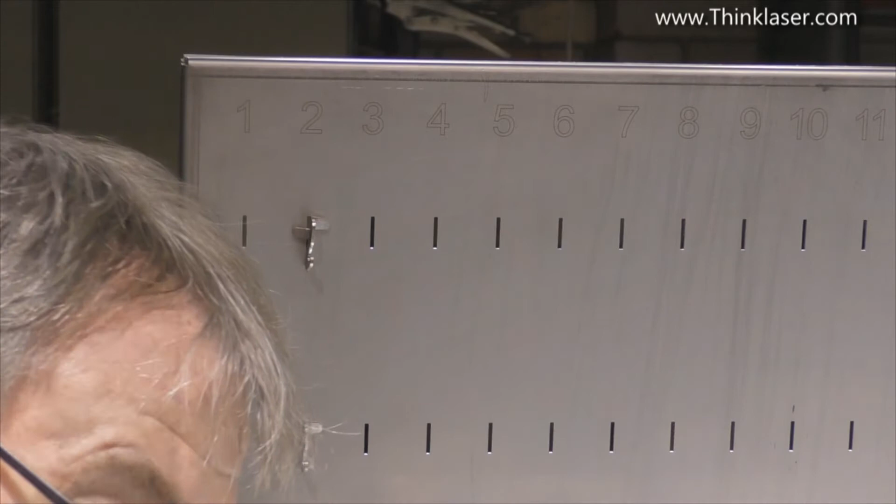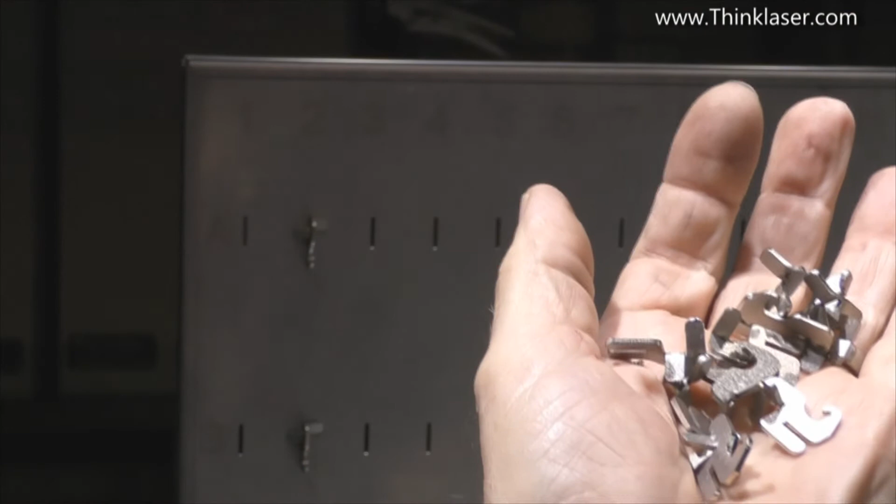The bunches of keys are various sizes, anything from the size of my fist down to a simple bunch of keys like mine. You can't have all these keys at the same pitch, so I've designed special hooks that fit into these slots in a solid manner. We pop them in the slot and then gently tap them down, and they remain permanently fixed in the slot. I say permanently, until you knock them out again.

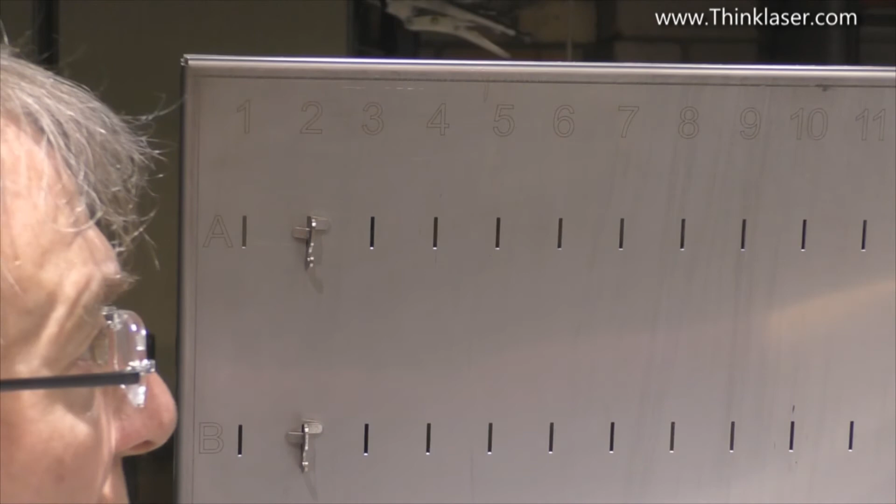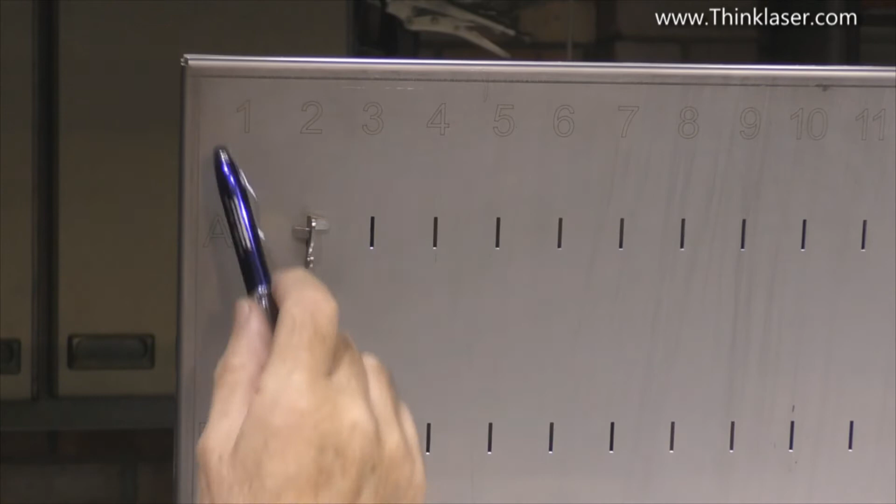What we need to do is mark this sheet up, as has already happened across the top here, with a laser, a proper metal laser engraver, and you'll see it's been numbered across the top. So all these slots, just like a spreadsheet, have a reference: A, B, C down the side and numbers across the top. So every bunch of keys can have its own reference.

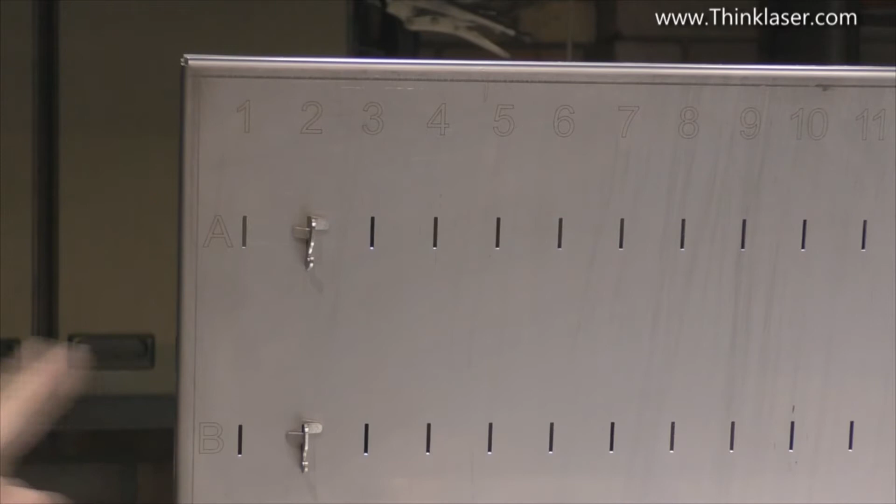The problem is these numbers, in this light, you can just about see them. But to be honest, they're not very distinct in a dark cupboard. What I've decided to do is overwrite these numbers elsewhere with etched solid black numbers and letters. That's what I'm going to show you today.

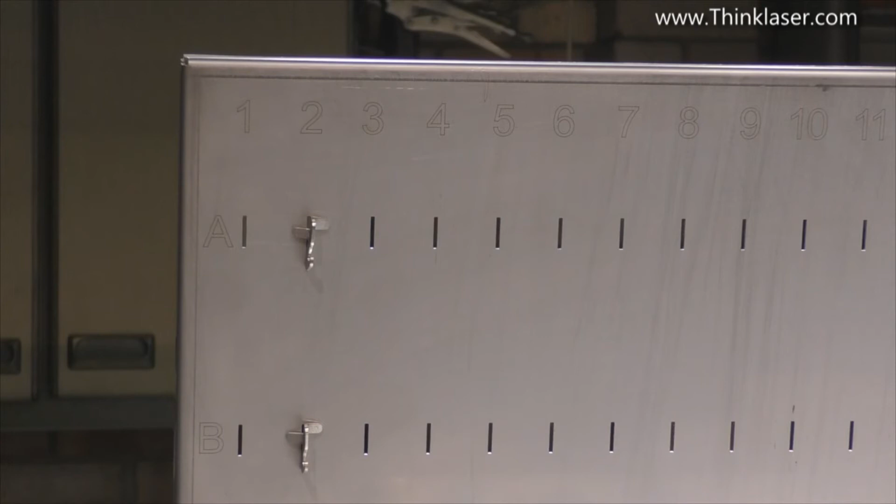Before we start that process, we need to go through a little bit of theory. There are some fundamental things about the laser beam which, in a way, I've been slightly misleading you about up to now. A laser beam is a parallel beam of light, and all the light is traveling in one direction, running completely parallel. It's what they call coherent monochromatic light. It is a light beam, but it's invisible.

I've been referring to it up to now as a beam of heat. That's where I've been misleading you, because it isn't really a beam of heat, it is a beam of light. It's only when that light hits a surface and gets absorbed into the surface that it turns from one energy form to another, from light energy to heat energy. If you can understand that simple principle, it will give you a much clearer understanding of how and why the laser beam works.

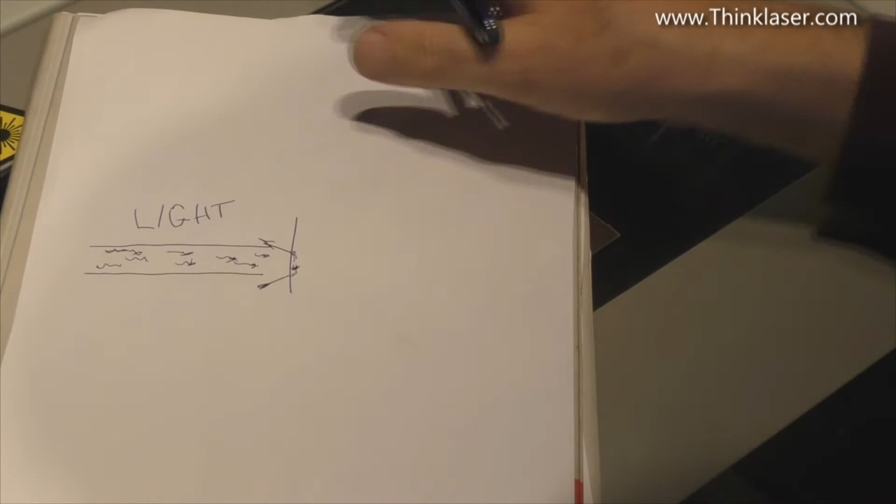When our infrared beam hits a suitable reflective material, and most metals are reflective to some degree, there are some metals which are extremely reflective, things like silver, gold, aluminium, copper. There are other metals, such as this piece of stainless steel I have here, which is about 90 to 95% reflective.

So when we fire this beam at any organic material, such as wood, leather, card, any of those sorts of materials, the surface absorbs the energy and starts to heat up, and if you heat it up enough, it will burn. That's the process by which cutting takes place with organic materials.

Now, with acrylic, the absorption into the surface creates heat, but the material immediately evaporates, it doesn't burn. If you fire it into water, the water absorbs the energy within the first probably less than a millimetre, and heats the surface of the water up so much that it boils and creates steam.

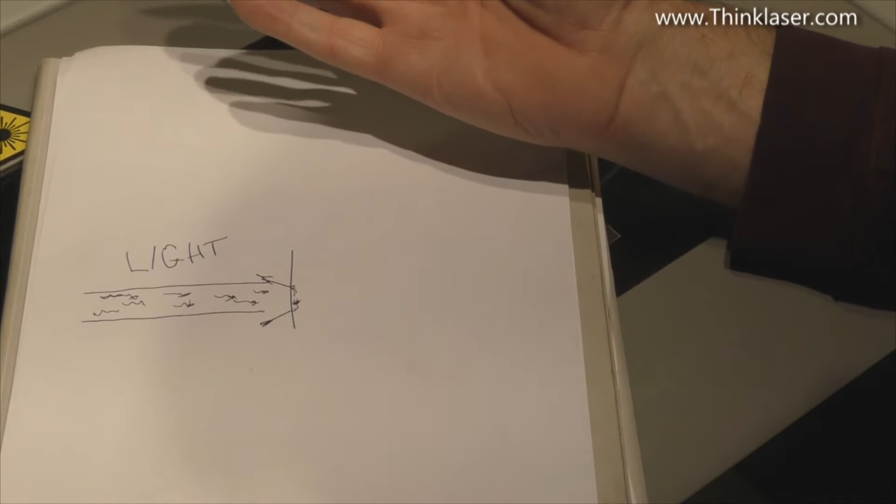Now, you've seen me demonstrating that probably in some of my earlier videos. So all I'm doing is reinforcing the fact that this beam is totally innocuous until it gets absorbed by an absorbing surface. So when we looked at creating marks on our piece of stainless steel, we were doing damage to the surface.

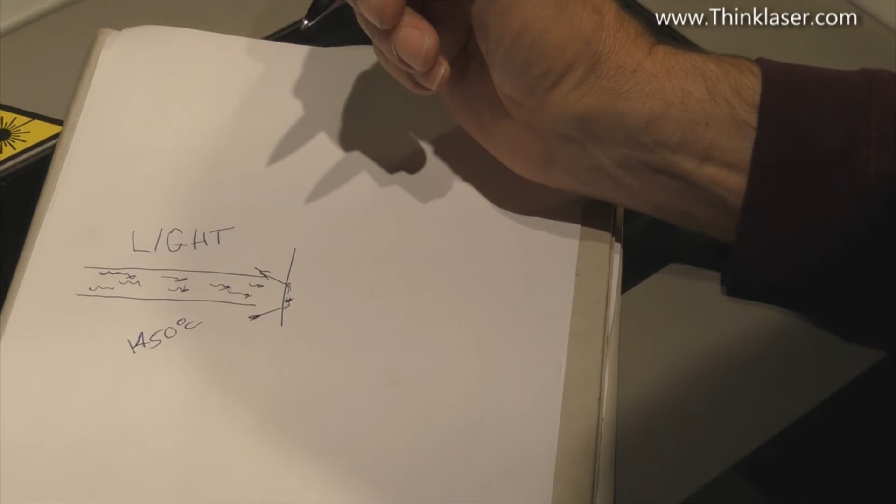Stainless steel melts at about 1450 degrees C. We're going to need a lot of heat to cause damage to the surface of our stainless steel, and we're not going to get that out of a 60-watt parallel beam like this.

Well, two things are going to work in our favour. First of all, the light in this beam is not uniformly distributed across it. We've talked about it before, and we've said that the energy distribution in this beam is what they call Gaussian. In other words, it looks something like this, where the centre of the beam is very intense light, and the light dissipates towards zero as we get further towards the edge of the beam.

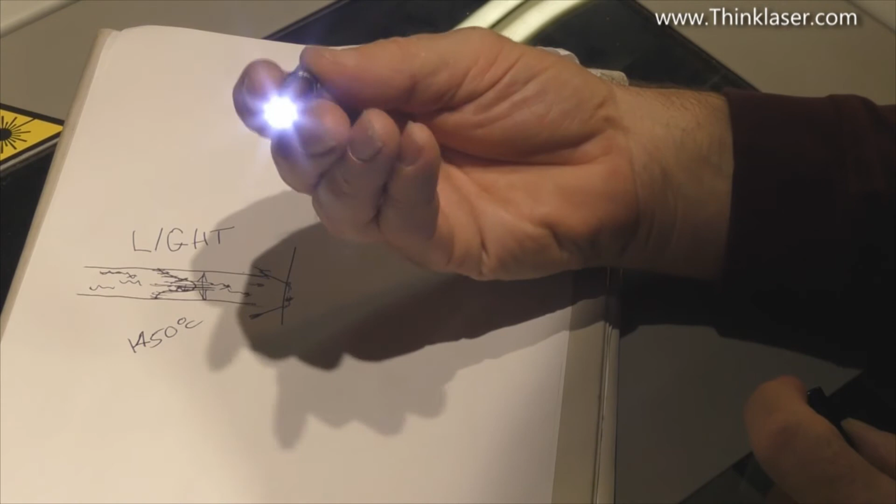Here I've got a lovely little magic pen, and it's a great demonstrator of that principle. If we look at that light there, you'll see that it is very intense in the middle, and it gets weaker and weaker as it goes to the edge. Well, that's exactly what this beam of light is doing as well. It is not a uniform puddle of energy.

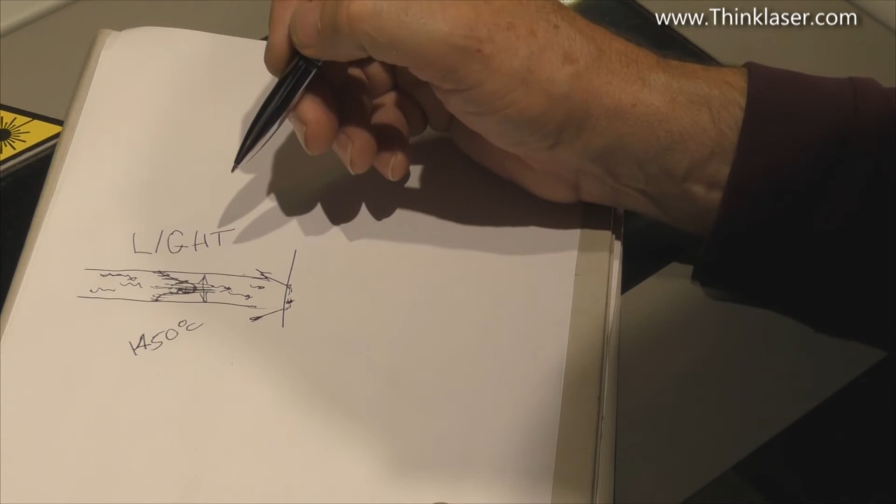When I've tried to measure with a thermocouple the temperature in the middle of this beam here, I know that it is more than 1300 degrees C because I've melted the thermocouple, and that is in the standard raw beam, as I call it.

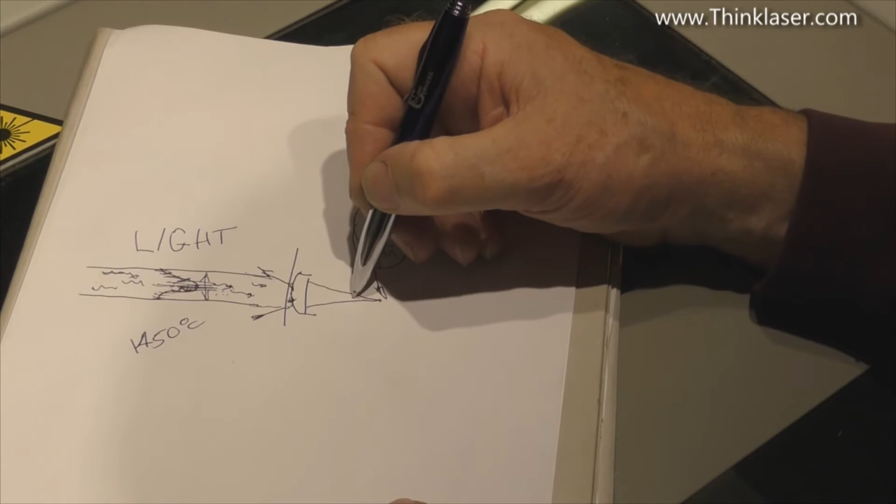But what we would then do is pass this beam through a lens where it would come down to a very, very small area, something that we've previously called the spot size. A 2-inch lens has got a spot size of about 0.1 of a millimetre. This concentration of the light becomes greatly amplified, and we get very, very high temperatures now at this spot of light because the energy density has been increased tremendously.

So now we can do damage to the surface of stainless steel. But of course, remember what I said to you, stainless steel is in fact reflective. So whatever you fire at the stainless steel, most of it will be firing back at your lens. And this time it will be at a very high temperature, a very high energy density, because it's firing off of a flat surface. And so consequently, it'll come back up here, and it's likely to damage the surface of your lens.

Now, if I shine my light on that lens there, you can see that little black spot there. Well, look, I've removed the coating from the surface of the lens by doing just that, reflecting the beam back onto the lens surface. And so that lens has now been completely destroyed.

So if I can't mark the metal surface by firing the laser at it, as we do in most products—you know, we just fire the laser at it and it etches the surface—well, we can't do that with metal because of this reflective property. So what we've got to do is adopt a different procedure.

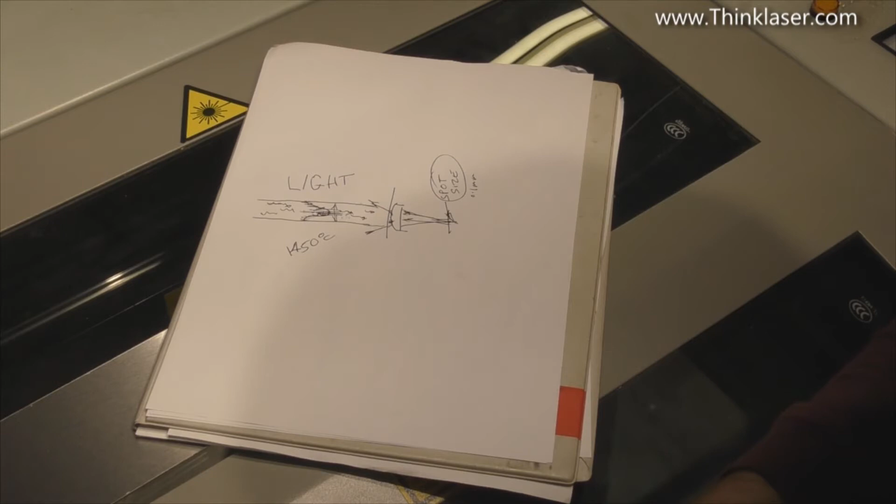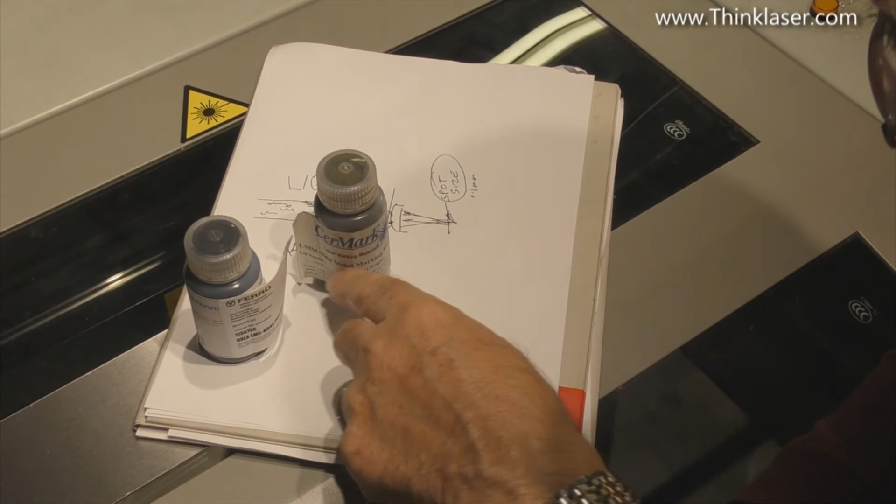And the procedure that has normally been adopted is to buy some expensive chemicals. This is a product called CerMark. This one's called a metal marking material, and this one is glass marking material. You can normally only get this stuff in the States. If you try and buy it in the UK, it's even more expensive because it has to be transported under very special conditions, and those transport conditions hike the price up even more. So from being maybe £10 or £12 in the States, it may be as much as £50 or £60 to buy that same bottle of material here in the UK.

Now, how does this material work? Well, basically you paint it onto the surface of your steel, your stainless steel in particular, and then you fire your laser beam at it as though you were engraving normally.

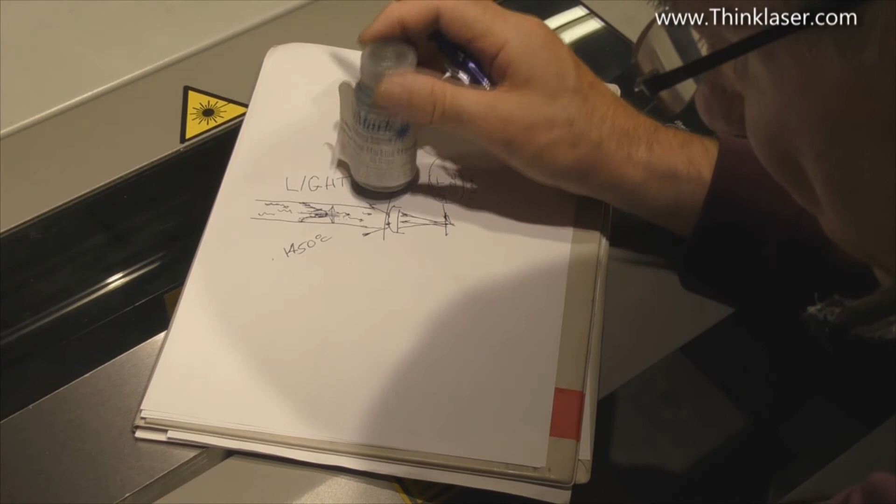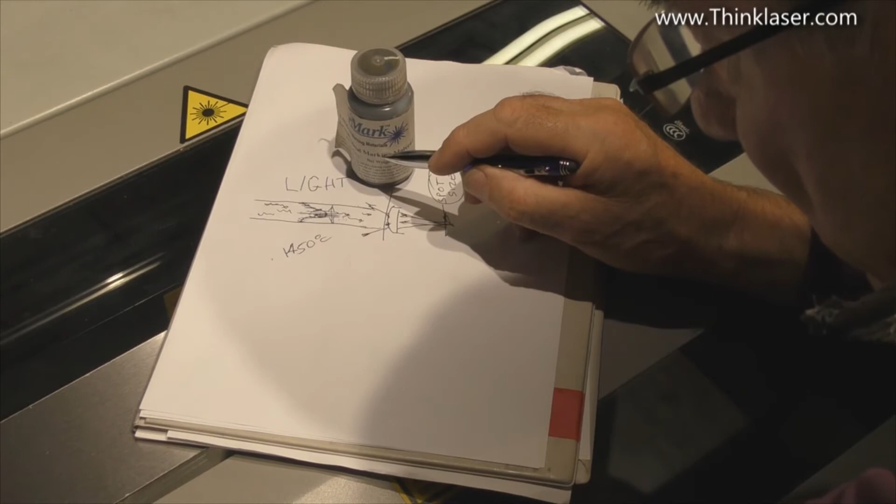Although you've got a very thin layer of this material sitting on the surface of your stainless steel, this material will absorb all the energy and convert it into heat. In heating up, it transmits some of its heat, quite a lot of it, into the surface of the stainless steel underneath. The combination of heating this material on the top surface and the stainless steel beneath causes a bonding action between some of this material and the stainless steel.

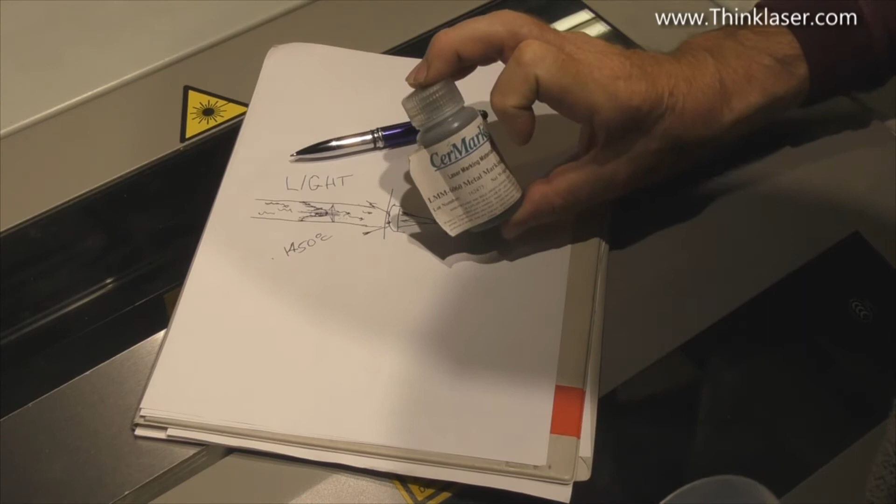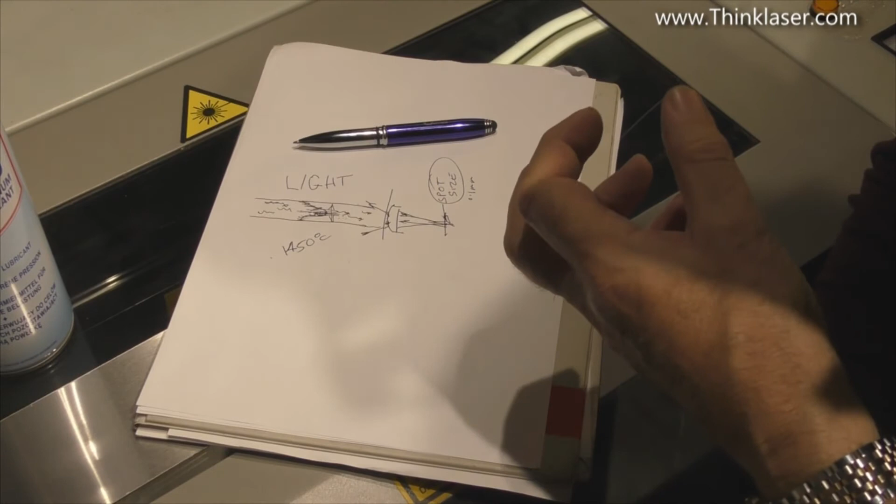That's basically the principle we're going to use today to mark this stainless steel. Instead of this little bottle of material, which would have cost me £60 in the UK, I'm going to use some of this spray, which cost about £10 or £12. These two materials aren't really the same, but there's sufficient of this active material in this dry film molybdenum disulfide lubricant that we can use it to perform almost the same task. If we get the combination of speed and power correct, we shall get a very good black bond on this surface.

Like any normal spray paint, you have to make sure this stuff is thoroughly mixed before you spray it. Then what we need to do is just spray the surface fairly liberally—quite a reasonably thick coating, as you can see. And we'll just get rid of the excess.

Now, because I'm very impatient, I shall use my hot air gun. It doesn't need to be rock hard, it just needs to be dry. We've now got a nice matte grey surface.

That is the surface, a very thin surface, that will more or less 100% absorb the energy from the laser beam. I've set this up to the correct focal distance. I've got a 2-inch lens in there, and I'm going to run this initially at about 100 millimeters a second, but I've got maximum power coming through the lens.

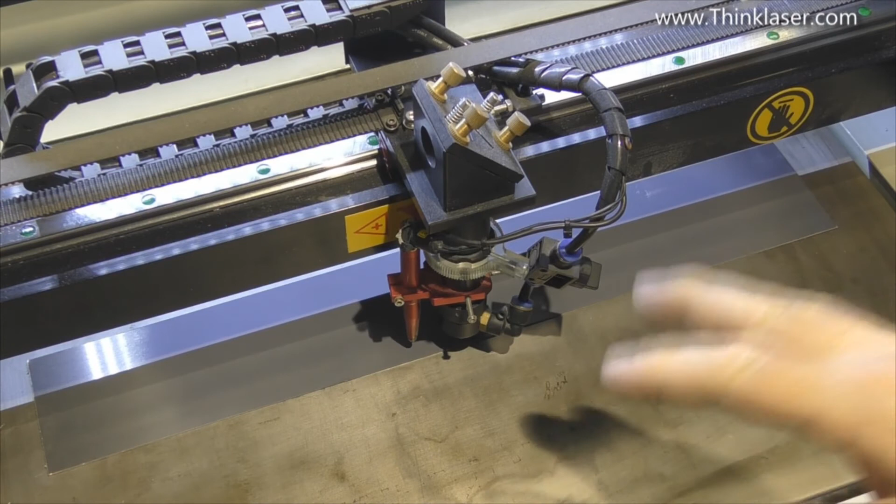We've got to try to develop enough heat in a single spot to produce this chemical bond. If we run too fast, we shan't get enough heat into a single spot to produce that bond, so I may have to slow it down if I don't succeed in the first pass. I'm going to close the lid down because this stuff produces some rather strange smelling fumes, and I'm not sure what they are. So I want to make sure I extract them safely into my Purex unit.

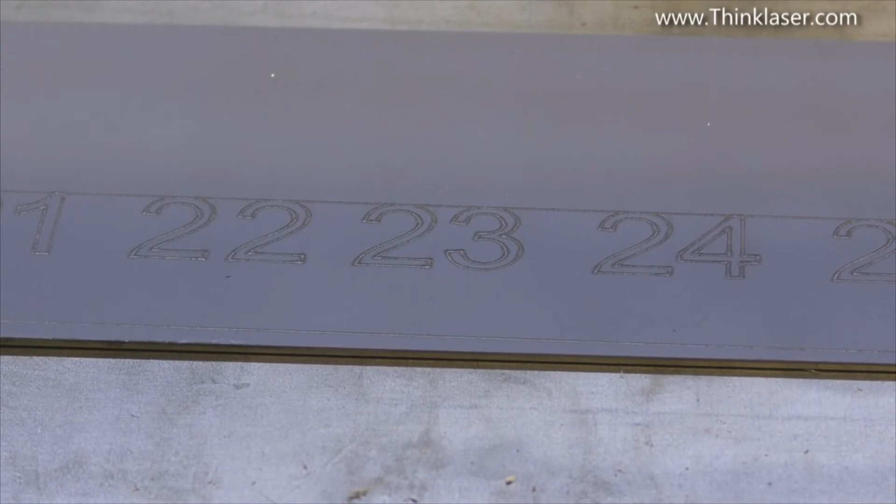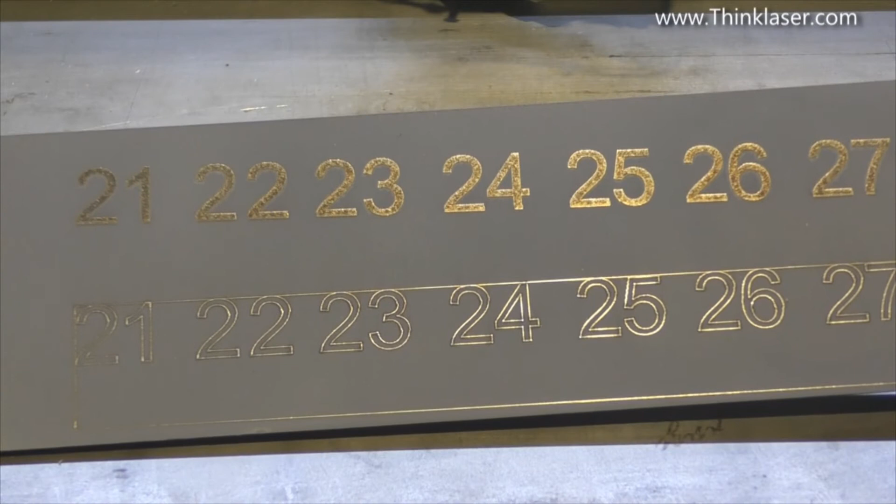For this first attempt, I've just done outline letters so we can see the relative density of the letters themselves. For the second test, I've rearranged the program, so I've got a small amount of air assist on there so the fumes don't come up and damage the lens. You can see 100 millimeters a second is actually quite a leisurely speed. We've got our letters that have hopefully been chemically bonded into the surface of the stainless steel.

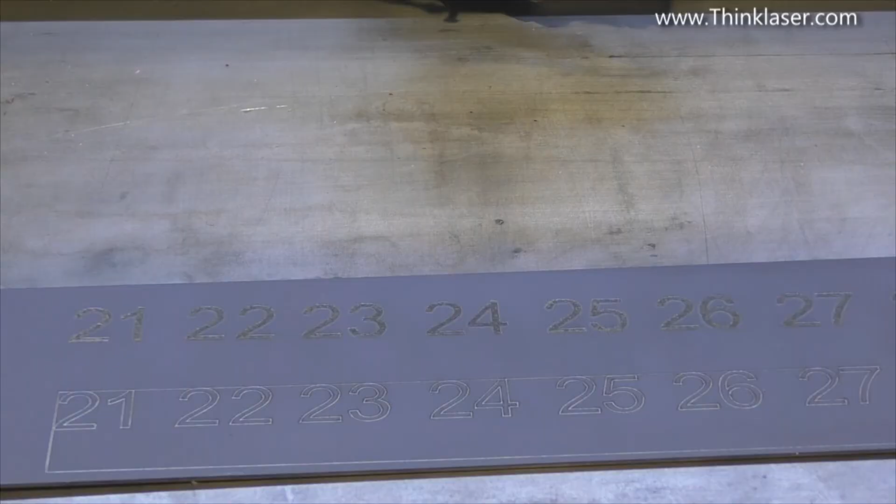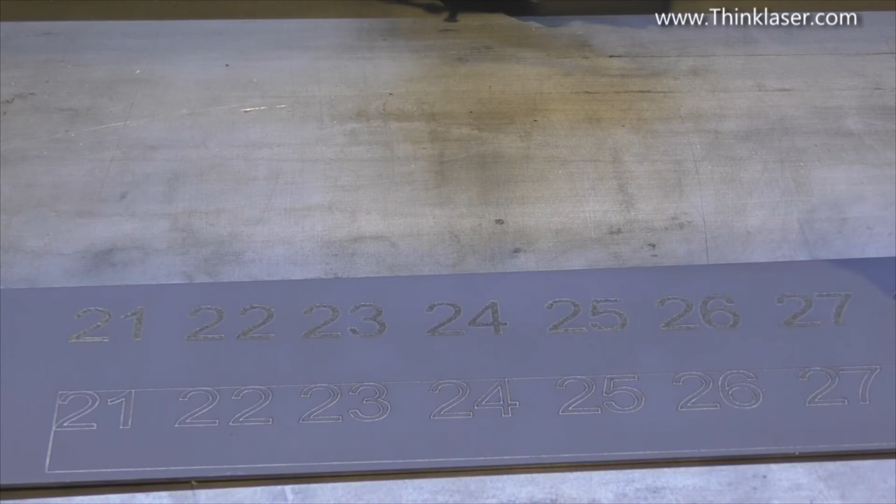The next process is a bit like magic painting. We need some of this stuff, acetone. And today I'm wearing my protective PVC gloves. We'll just go for a final clean up.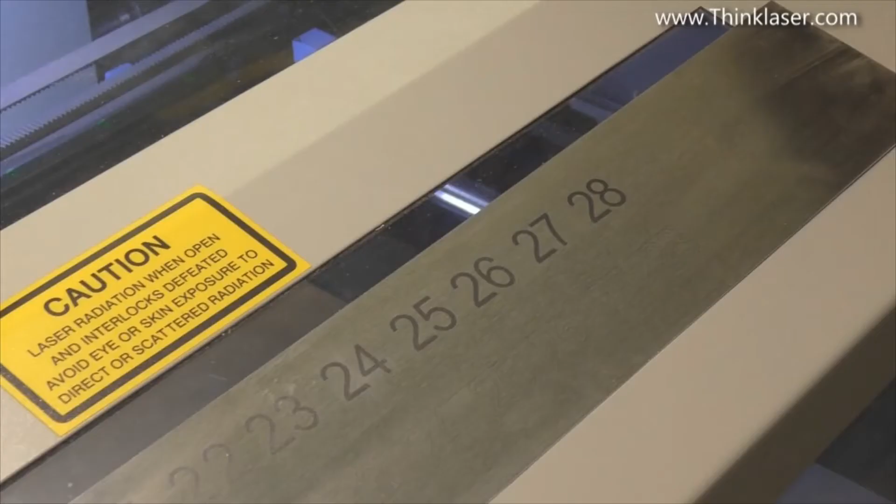And there we go—you can see how nice and crisp and clean those letters are. Now, what I want to show you is this: yeah, I've scratched the surface, but I've not taken the letters off. Those letters are chemically bonded into that surface. So I've scratched the surface but haven't erased the letter, and it produces nice, crisp, black letters. That was just a test.

Now, before I start on this rather large, wide sheet of material, I've got some slightly narrower sheets here that are probably only about 300 millimeters wide. It requires the same type of lettering, different numbers, but I'm going to do this easy one first, because if I make a mistake on here, I can turn it over and use the other side, because this sheet is not yet bent.

When it's bent, there'll be a front and a back, but at the moment both sides are exactly the same. So I have 2 shots at getting this job correct. To be honest, I'm very confident I should do it in one, but there is an escape road that makes me more comfortable. Now, it's all very well me showing you what I'm going to do and how I'm going to get these numbers and letters into exactly the right place against the slots in both planes.

Well, obviously I'm not going to do it all in one go because there's no way that I can make the unit pass through the machine.

But what I'm going to do now is go back to RDWorks and show you how I program these numbers. This is how I've imported my sets of numbers. As you can see, I've got 2 sets of numbers here. Well, we don't need both those sets of numbers. And I've also shown you the slots that I've imported as well.

So the first thing we're going to do, let's just say we're going to do 21 to 29 to start with. I will delete that set there and we'll work on this set here.

Now the first thing I need to do is make sure I know where I'm going to put my head to start with. The important thing for me to do is to accurately position these numbers relative to my slots. And the way that I plan to do that is to mess around with this green dot.

So we'll go into Config and System Setting. And here we'll change the position of the green dot, which is the start point for the head, to the bottom center. Close. Now watch what happens to the green dot now.

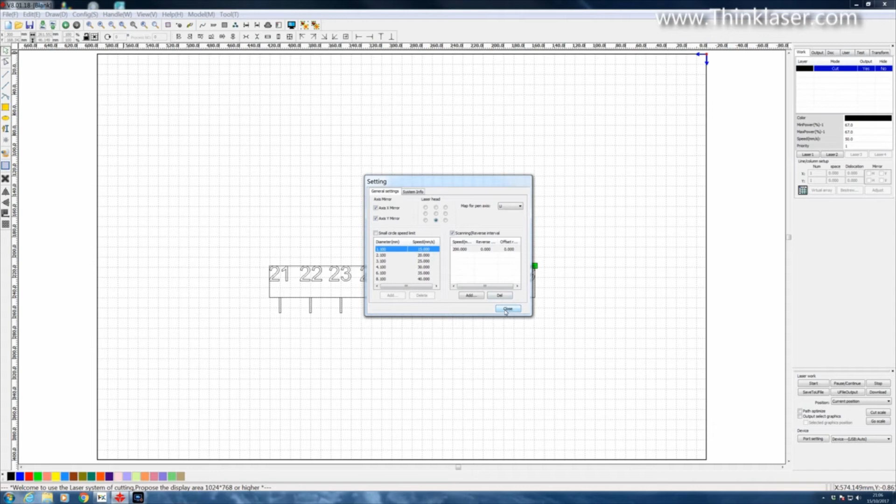It goes down to there. But look what happens when I remove the slots. So that basically means the head is sitting at the top of the center slot. And that's where I've got to locate the head to get my letters into the correct position.

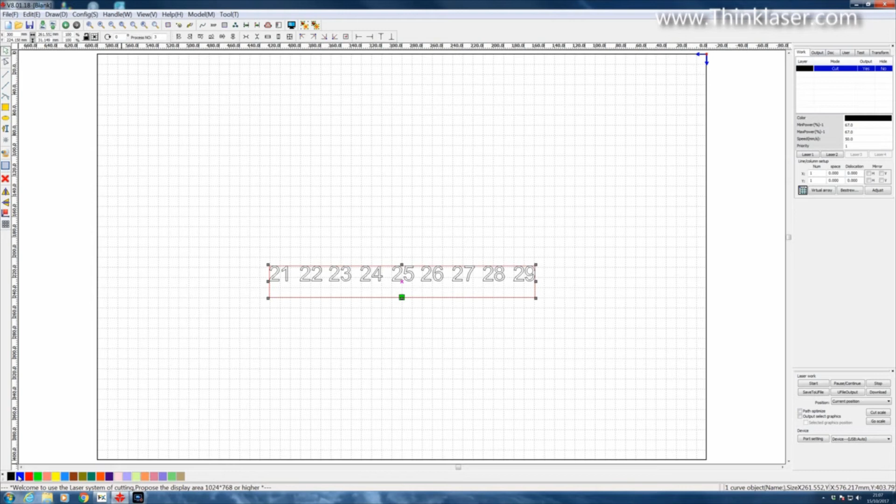And the reason why I've drawn a rectangle around the letters like that is so that I can put that particular feature onto a different layer. And let's put it onto a blue layer. And on this blue layer up here, we'll set output to no. In other words, I don't want that rectangle to print, but I do want the green square on the center of that rectangle for location.

And so now what we've got to do is go to the black letters, which is the parameters up here. Output yes, speed 100, blowing yes, scan and max power. That's all we need. So now I shall output that to a memory stick.

And now we can be a little bit clever, save ourselves some time by pressing Ctrl and Z several times. And there we go, we're back to our original. So now we can delete this one.

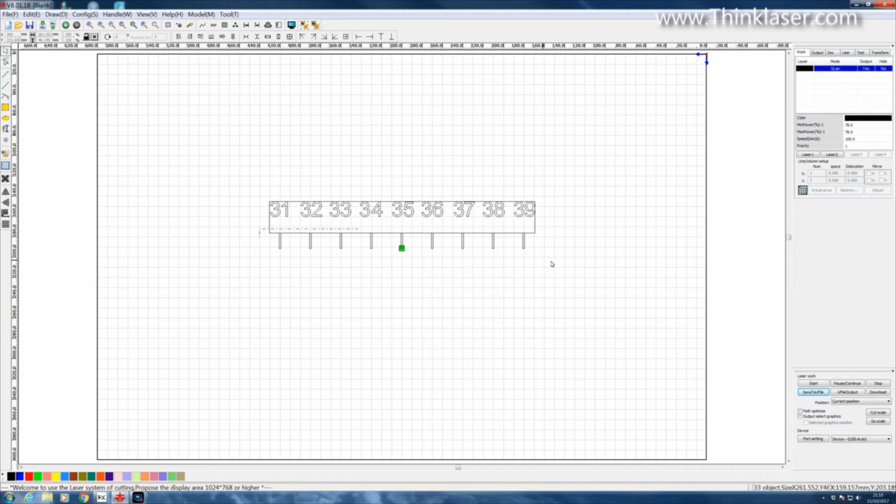And we can delete these. We can colour that a blue layer. And it should already contain the properties that we want.

Just check, output no. That's all we need to worry about. All the rest is unimportant. Okay, and we've got our position in the center.

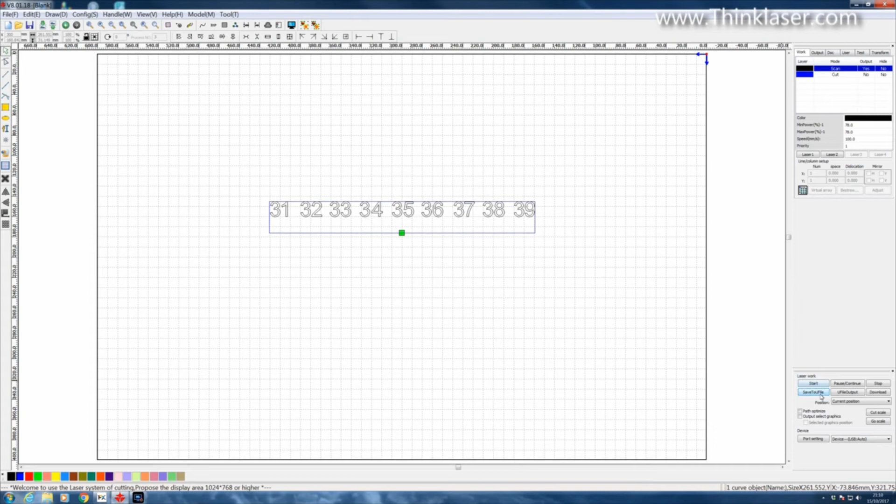And now we'll just check the black parameters. 100, output yes, blowing yes, scan yes, maximum power. Okay, now we can save that to an output file. Back to the machine.

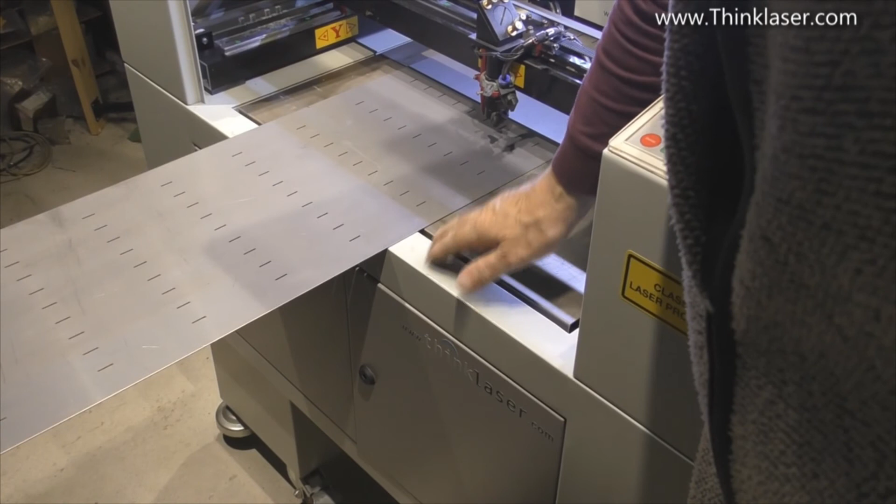Okay, well I've set myself up the easy one to do with, which is a set of numbers right across the middle of the sheet. But that means I've got to hang one end right out of the machine, and to support it, to stop it drooping, I've had to use one of my tripods. Now what I've also done is set the table so that it's completely level with this and I can pass right through the machine. So I've removed the plate on the back so that this material can pass through the machine.

Okay, now if you remember, the idea was to line the head up with the top of this slot. So we'll do that now because that's where we've got to set the origin point. What I've also done is made sure that my sheet is running square to the edge of the machine. We'll set that to 5.5. I've got air assist on.

We don't want too much air because we're not trying to cool the surface down. We basically want to keep as much heat in the job as we can. Extraction on, and we're ready to go.

Right, now you may think we're going to do these letters individually, but as you can see, I've copied a slot with a letter beside it. Now I don't need the slot, other than I'm going to use the slot as a means of setting up this rectangle, and the rectangle will then be where I start from. In other words, I shall start putting my letter from the top of a slot.

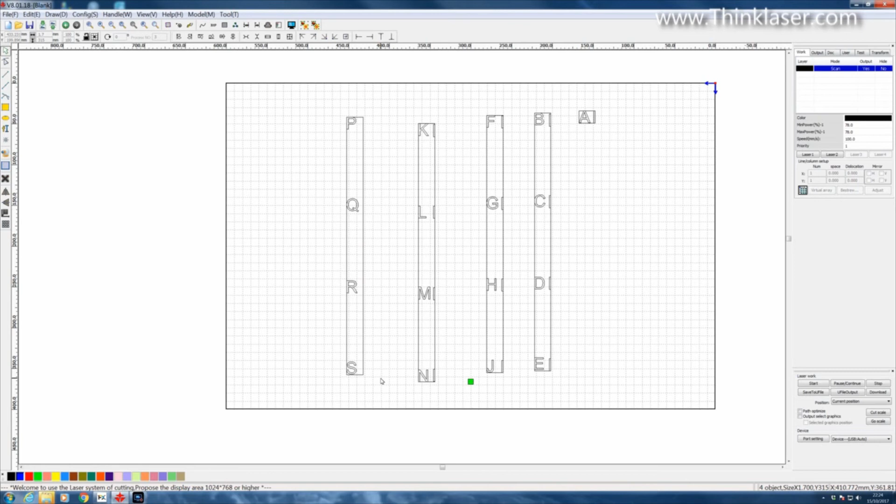So to do that, first of all, where should we start? We could start at the end, S, and work our way up the sheet. Yeah, let's do that. So I shall remove those slots, and I shall remove those. Then I come up here to config, system setting, and I'll change my location for the head now to top right. Okay, so that's where my head will start, on a slot. And then I shall basically engrave 4 letters in one program.

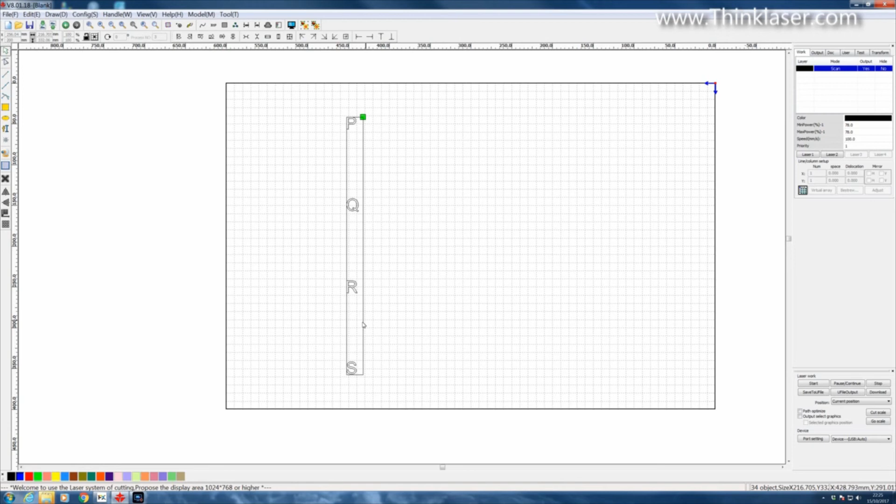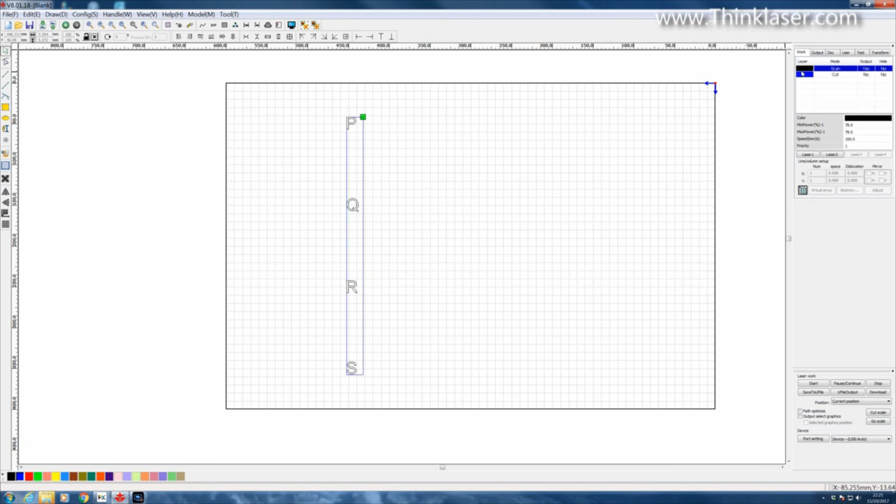So the first thing we've got to do, if you remember, is, we don't get rid of it, we need it there, so we change it onto a different layer, and then we'll make that blue layer output no. That's good. And if we look at the black letters, we should find the black layer is still set. Output, yes. Engraving at 100mm a second. Is it blowing? Yes. Scanning? Yes. Maximum power? Fine. And we'll have an interval of 0.15.

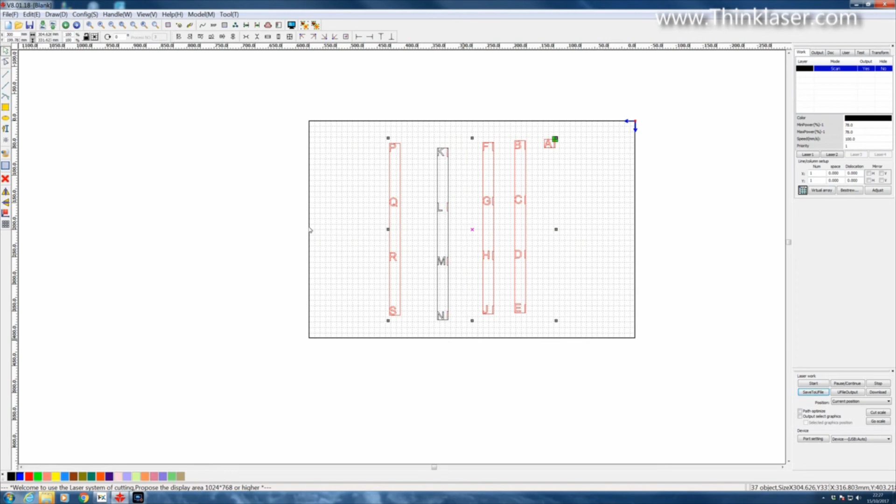So we can save that to a U file. Control Z, and we've got everything back again. We can delete that. Hold down the Shift key and delete those. And at the same time, we can delete those slots. We've already got our little green square at the top right hand corner. All we've got to do is to mark the outside shape, put it onto a blue layer, and hopefully the job is done. Okay, let's go and do those.

And here we are with the program working. 4 letters at a time. So it's not too tedious. You've just got to keep loading the program.

Okay, well now I'm stumped, because here we've got a 600 wide sheet on a 600 wide machine, which I thought was a 600mm pass-through machine. It turns out not to be the case. The aperture at the back is 600. The bridge is only 560, and there are pillars in the way that hold up the back plane that limit you to something around about 500. So in reality this is only a 500 pass-through machine. The maximum you can get is 560 if you were to take the pillars out.

That basically means I can't engrave the letters down the side. The best that I can do is to engrave the letters at the top and turn my program round and run them upside down from the bottom, and just run with 2 sets of numbers. Well, we are managing to do the letters across the top, and I've now turned the sheet round and we're doing the bottom row of numbers upside down, as you can see. So yeah, we've 20% done the second part of the job.

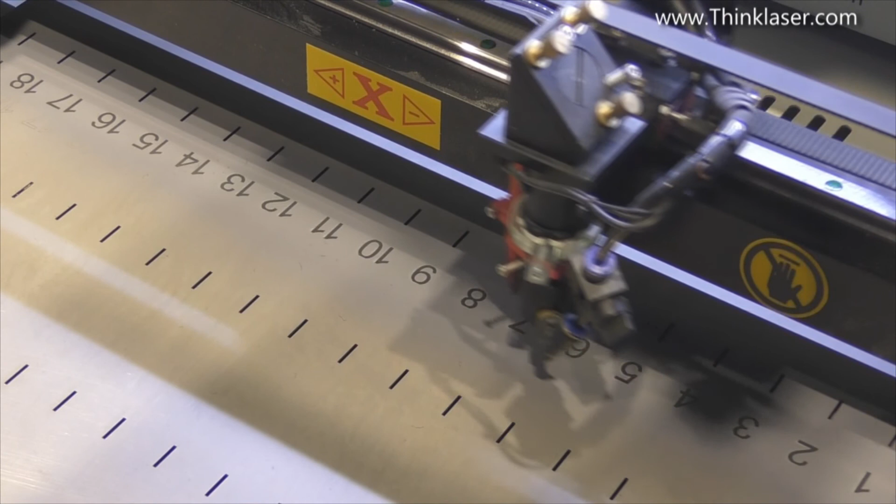There's a central row of numbers that are missing, and all the letters down the side, but hey, I'm sure we'll make do without them, because we've got adjacent doors with the numbers and the letters on as well. Well, it's sad that we couldn't complete the job, because as you can see behind me here, this stuff does a very good job of producing very durable black letters on stainless steel without any fear of damaging your machine.

Well, thanks for your attention. I hope that's been of some interest to you, a practical demonstration of something that's real and not just an experiment.